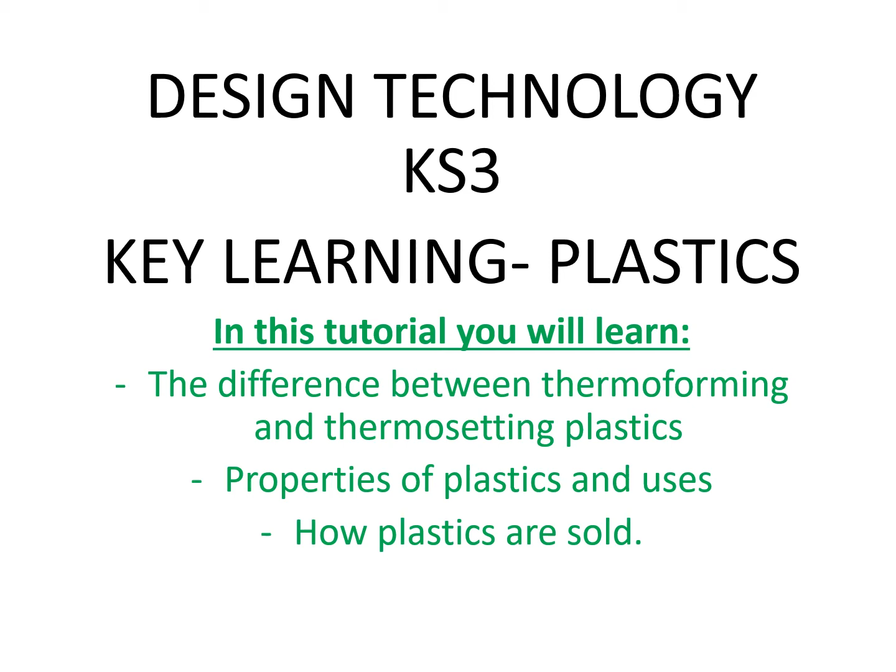Plastics can come from two different sources. Most plastics are synthetic and come from crude oil. However, you can get some natural plastics, such as rubber from tree sap and cellulose that comes from plants. However, the majority of plastics are man-made, coming from crude oil.

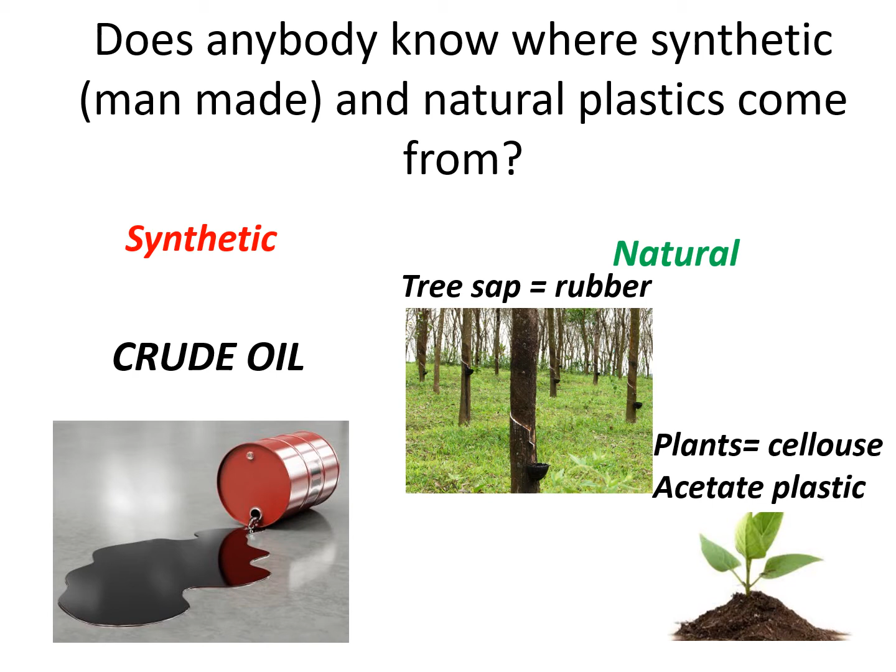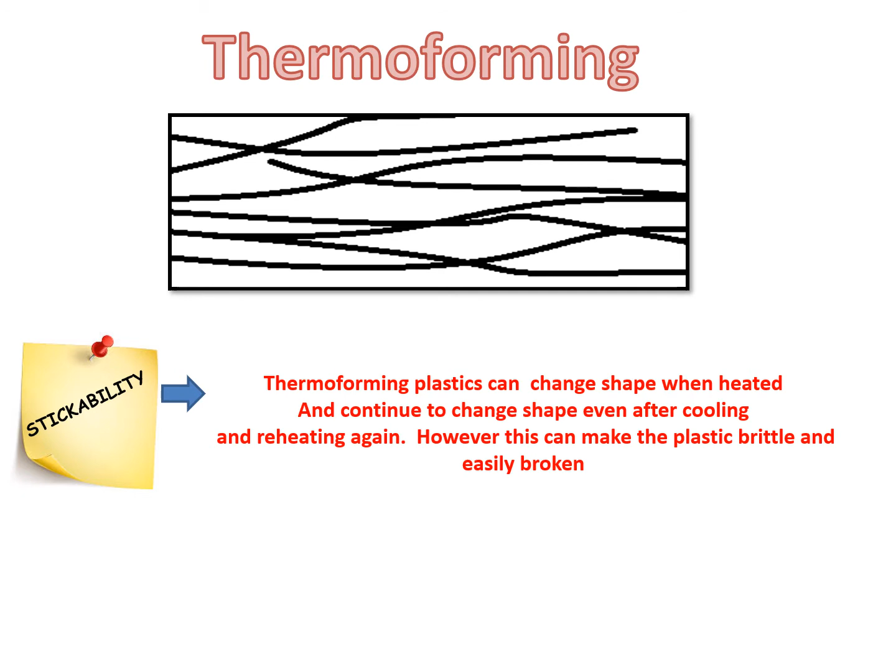Thermoforming plastics. Thermoforming plastics can change shape when heated, and they continue to change shape even after cooling and heating again. However, this can make the plastic brittle and easily broken, but also makes it more recyclable. Here we're going to discuss some different types of thermoforming plastics. Remember, these can be heated and remoulded again.

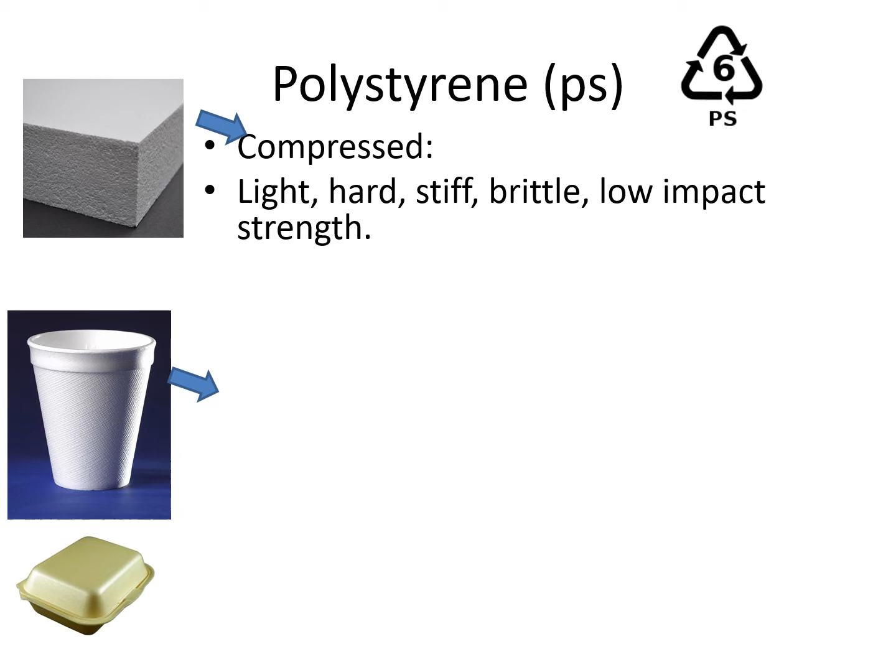The first type of plastic is polystyrene. This can be abbreviated to PS. You can get compressed polystyrene. This is when it's squashed together. It's light, hard and stiff. It is brittle and has a low impact strength. It ignites easily and can be weak if used over a long period of time. It's mainly used in fridges and water tanks.

The other version of polystyrene is expanded. This is buoyant. This means that if you put it on water, it will float. It's lightweight and a good insulator. That's why we use it for coffee and tea cups. However, it can crumble and break easily. It's mainly used in packaging.

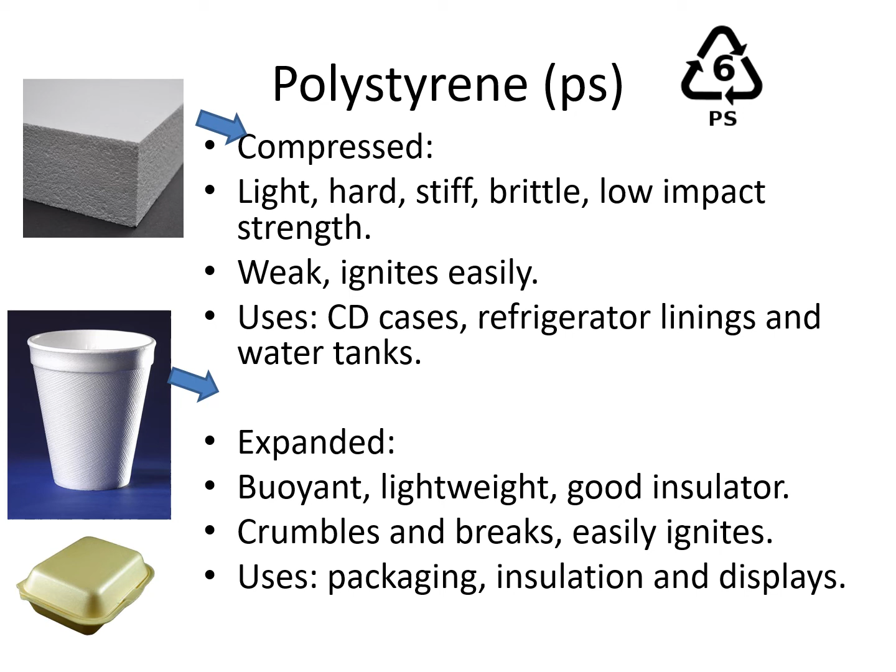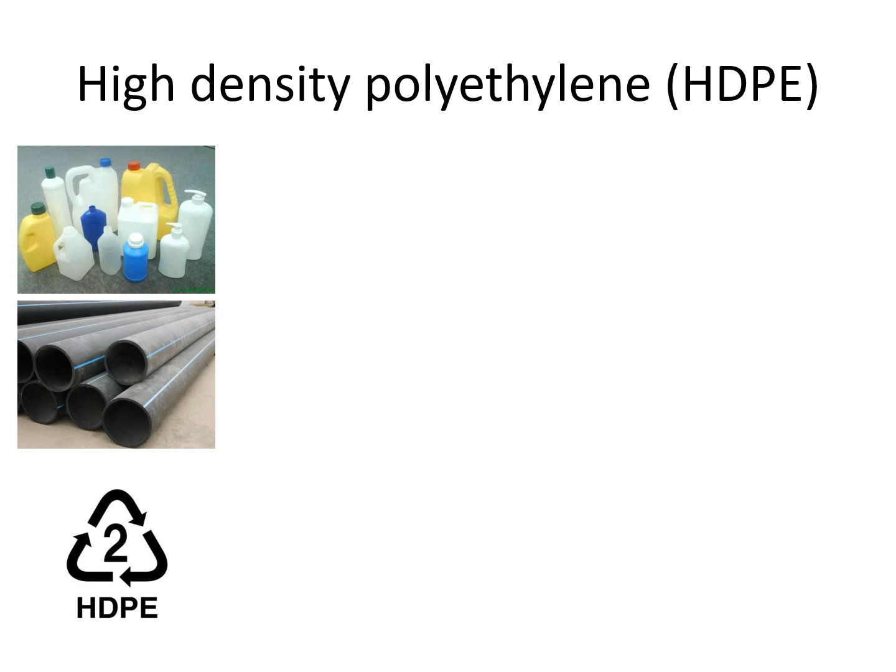Lastly, in the thermoforming plastics category, we've got HDPE, high density polyethylene. This is a good electrical insulator. It's also chemical resistant. It's impact resistant and flexible. The problem with this is it can break under stress, and the colour tends to fade over time. Its main uses are water tanks, water pipes, buckets and bowls.

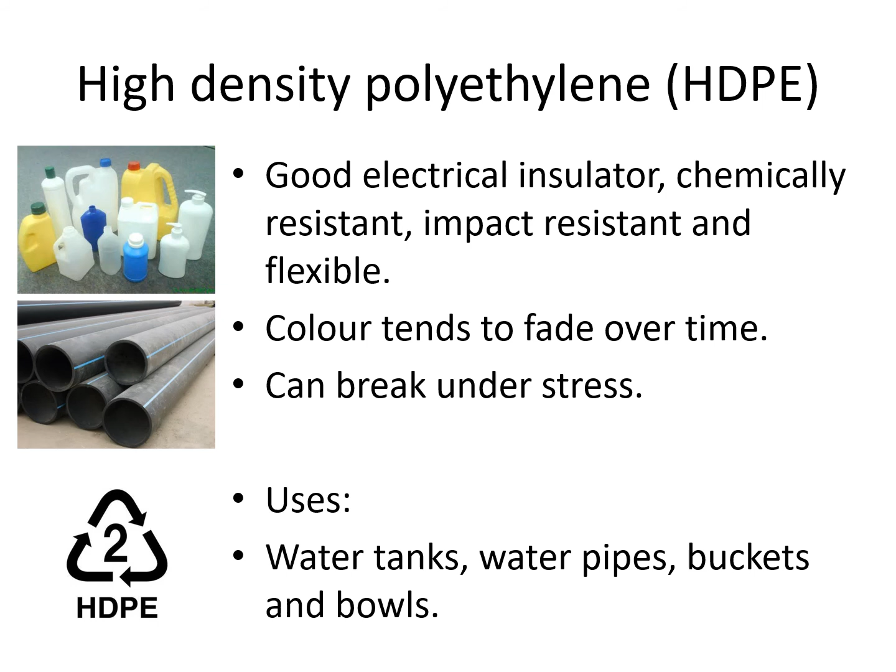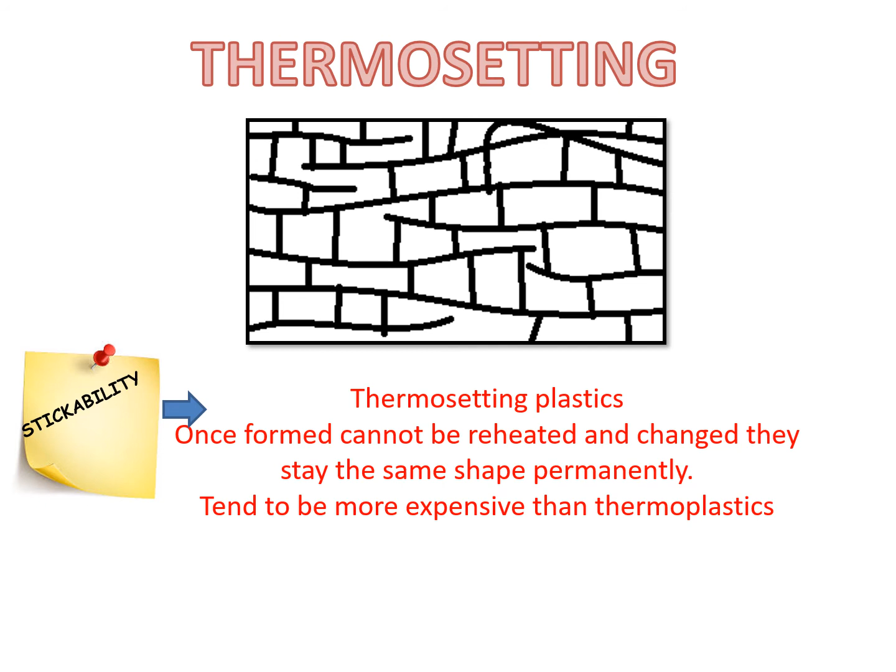Thermosetting plastics. Thermosetting plastics, once formed, cannot be reheated and changed. They stay the same shape permanently. They tend to be more expensive than thermoplastics.

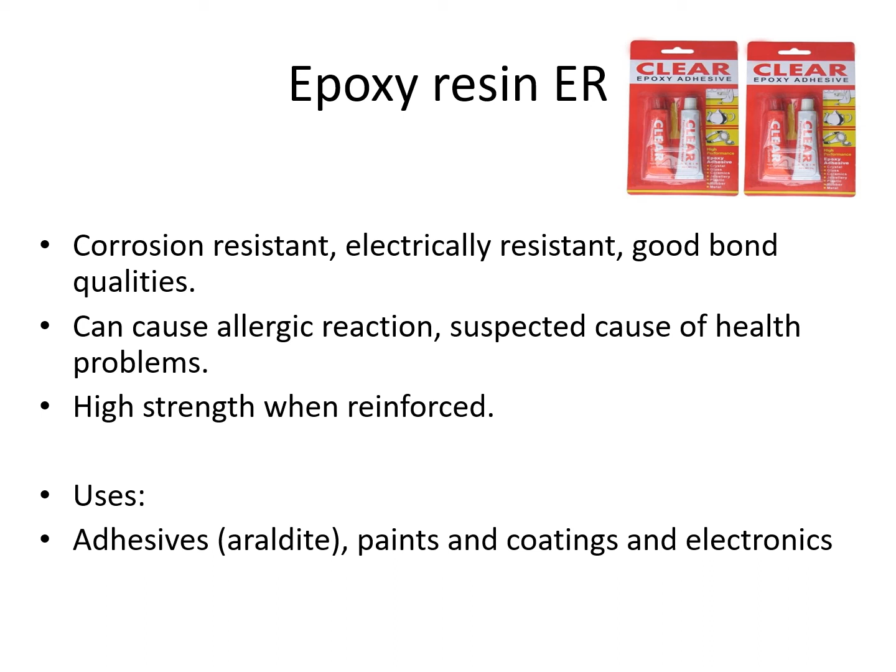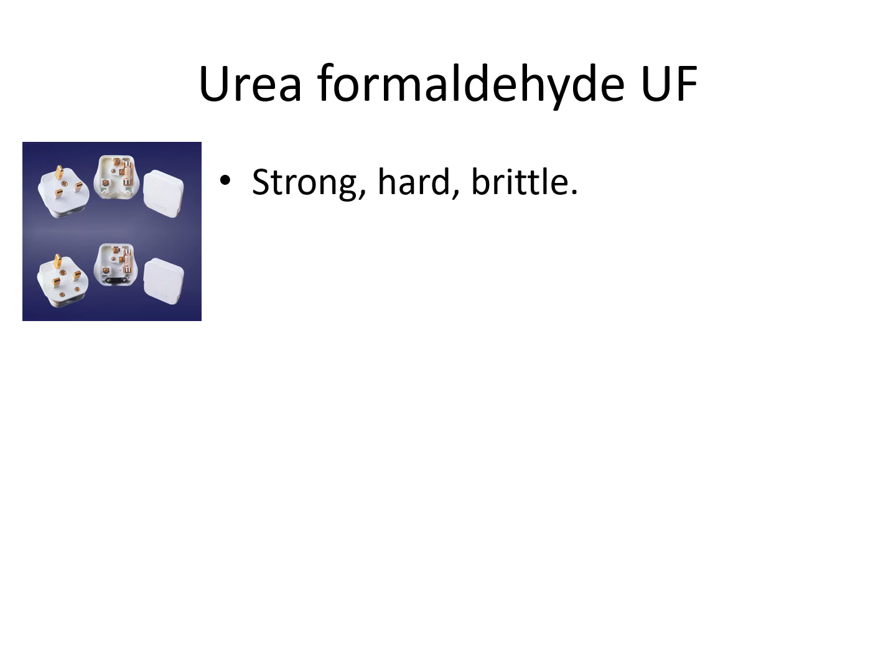The second type of thermosetting plastic is urea formaldehyde, abbreviated to UF. This is strong and hard, but is brittle. That means if dropped, it could shatter. It's heat resistant, that's why it's used on plugs.

Plastics are sold in different ways. You've got long sheets of plastic. These are the ones that we use on the laser cutter. Bars and rods, these might be used for tables and chairs. Film, like cling film, and tubes that can be used for guttering and pipes. If you want to revise this section again, you might want to make a mind map to revise what you have learnt.